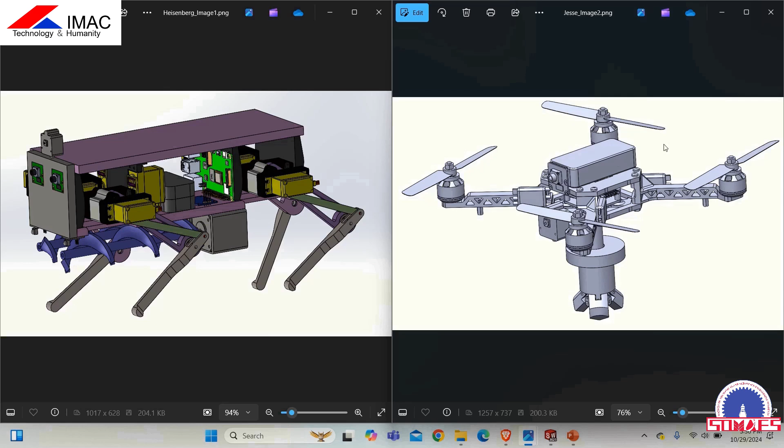This robot that you see here, this is an aerial robot. Jesse is a rescue drone which is equipped with advanced technological features, and it includes a gripper mechanism.

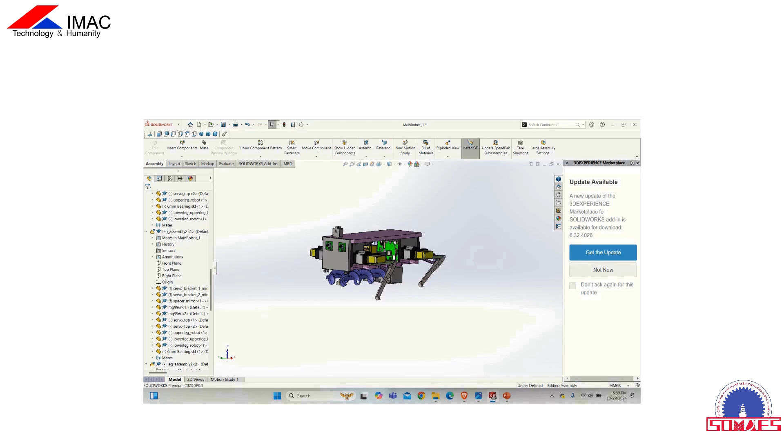So this is how Heisenberg looks in SolidWorks assembly. Heisenberg is basically a robotic dog type body that has been set up along with a helical movable body in the lower part. This is the helical movable body which will help the body float and commute on the water surface.

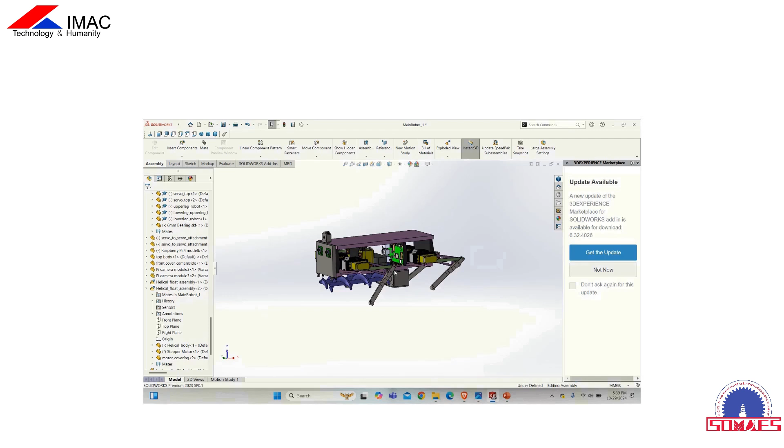This robot, we believe, is capable of navigating its own route, collecting information, and processing it to the main station to report the scenario and damages of the landslide and disaster-prone areas. This is equipped with a few cameras. This is the thermal sensing camera.

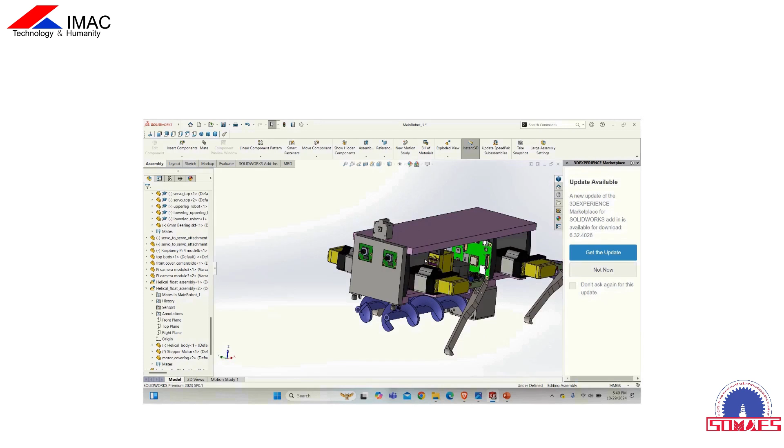This is just a prototype. It was very hard to design an actual thermal sensing camera. So using these technologies, an infrared sensor is also kept over here.

Using all of these in a combined way, it is, we believe, capable of navigating the route and processing information on the site of disaster. With the help of strong processors like Raspberry Pi and equipped cameras, we believe this is possible.

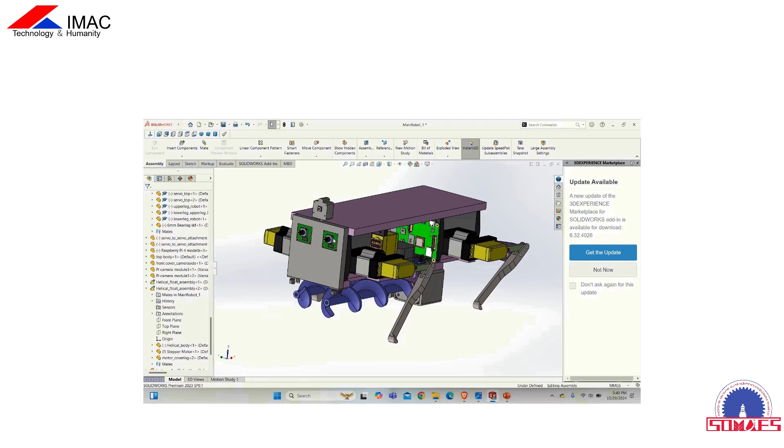It is also capable of doing computer vision tasks like object recognition and image recognition, which will be utilized to avoid obstacles and even while reporting certain instances of data.

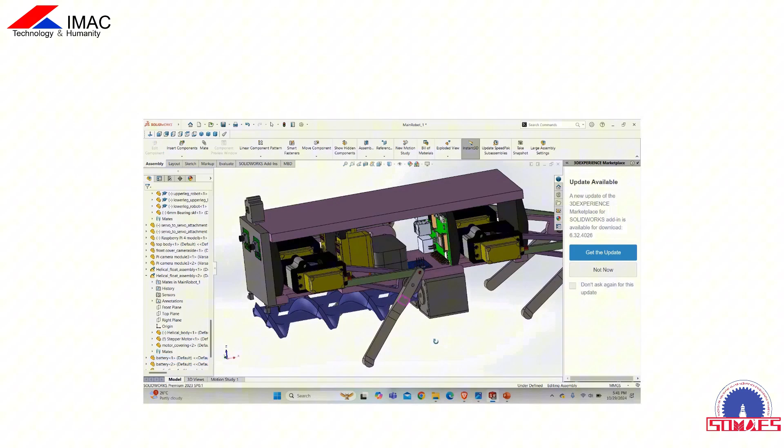It is equipped with two batteries, two lipo batteries, for this moment. One battery is responsible for controlling this terrestrial system, and one battery is responsible for controlling this aquatic propulsion system. I think this is going to help a lot when it comes to power save, because we are maximizing power optimization by using two batteries and also not compromising on performance.

This is the GPS sensor. It is also a prototype.

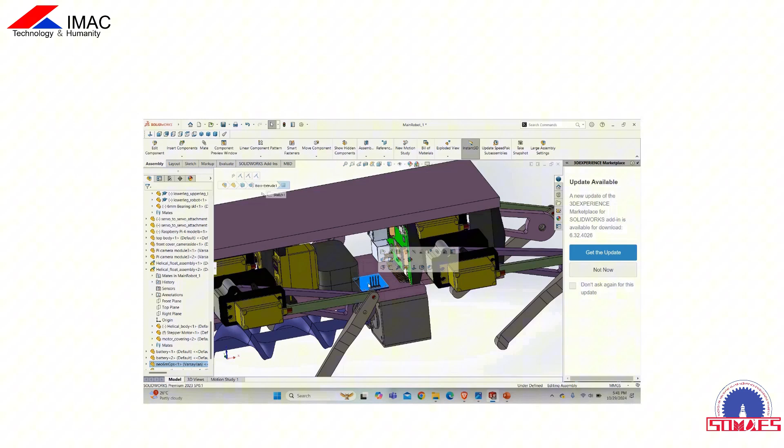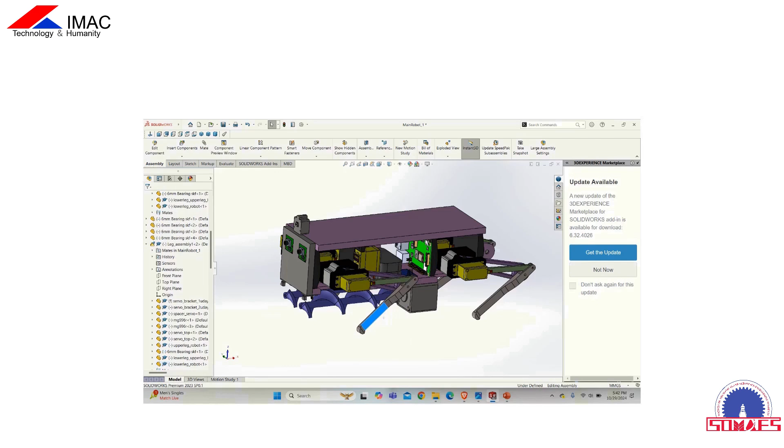So let's know more about the mechanism, the locomotion mechanism. So this is the locomotion mechanism. This way the robot will work. This is inspired from Boston Dynamics Spot, but it uses a 4-bar mechanism and it uses servos to perform that.

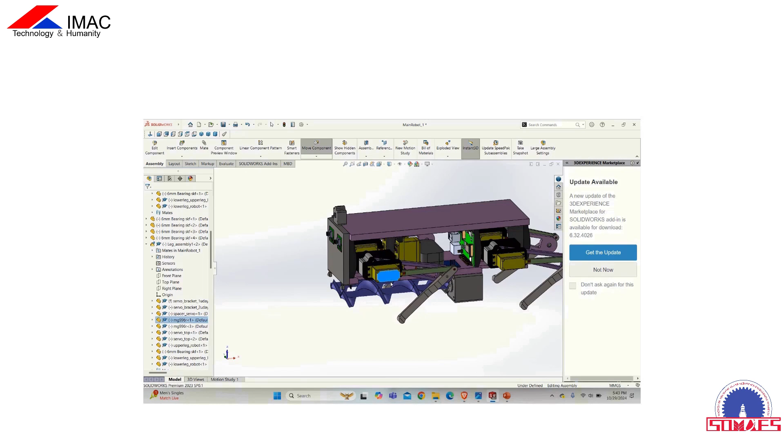So there are two linkages of servo, and these two front legs are capable of moving this way as well, so that it will be easy to balance themselves on difficult terrains and also work on difficult paths and maintain movement in different directions, not only straight but also angular direction.

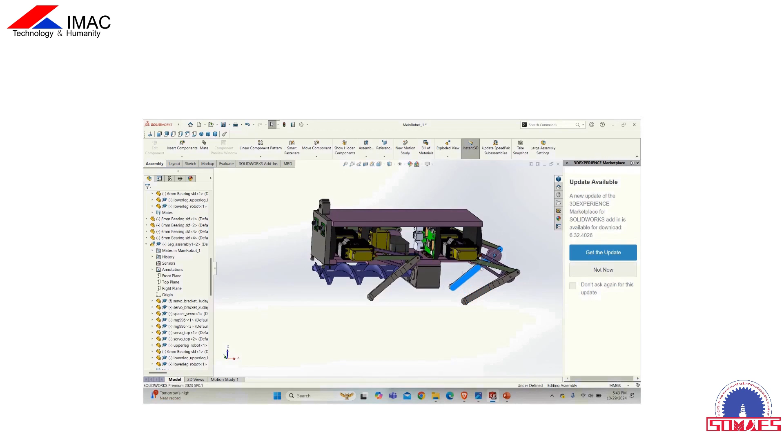So this is how they will work. This is applicable for all four legs. This will be controlled by the servo motor.

This is tilted with the help of this servo, and it will help the robot even go on different directional courses, like it can move at certain angles as well. So this is, we believe, really helpful.

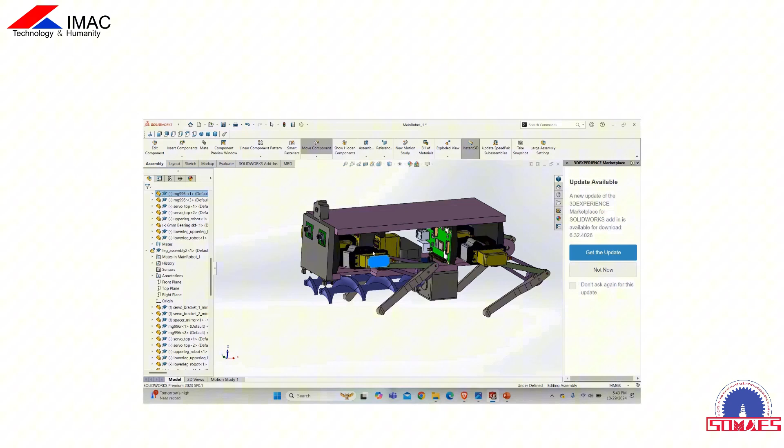Also about the helical screw propulsion system, this will most probably rotate clockwise, and this will rotate anti-clockwise, and this will help the robot move in a straight manner, and will tilt to attain a certain direction. So this is how the robot will perform inside water.

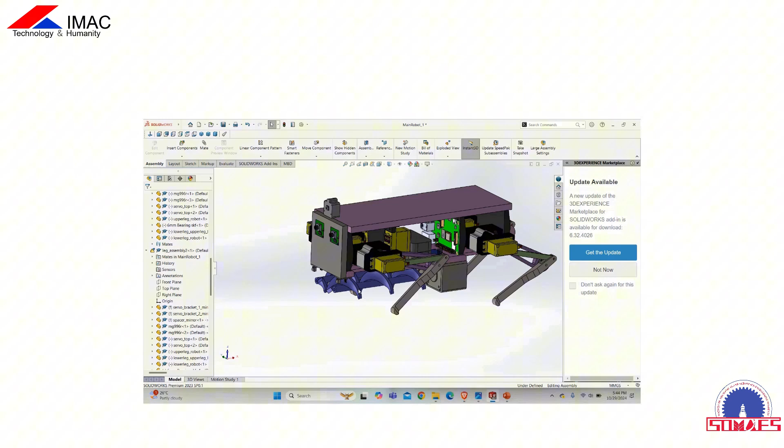So this way we can say that this robot is truly amphibious in nature. This robot is capable of transitioning seamlessly between land and water. On land, the servo-driven legs provide stability and movement, while in water, these helical screws activate to propel it through the water. This versatility will make it suitable for rescue operations, environmental monitoring, and exploration tasks, even in difficult terrains.

So this second robot, its name is Avenger. It is inspired by the rescue drone that is used by the fire department in Oak Island, North Carolina. The video link to that drone is provided in the introduction section of this robot, in the PDF that we have uploaded. This is an aerial robot that is highly mobile, convenient, and fast when it comes to rescuing victims.

This drone is equipped with modern technology. There are GPS sensors, strong microprocessors for the data collection and retrieval system, and there is a gripper mechanism as well, which is very useful and very handy for this robot.

It can be actuated and it closes like this. It can work based on some pneumatic or motor-driven system, which will be controlled by the control system of this drone. It will incorporate AI and machine learning to do a lot of work to identify the disaster site and thoroughly investigate the desired site.

So there is use of two cameras here. This is the thermal sensing camera, and this is the FPV camera. In this case we have employed a Raspberry Pi camera, but in case we are building this in a more expensive manner, we can import some expensive FPV cameras as well.

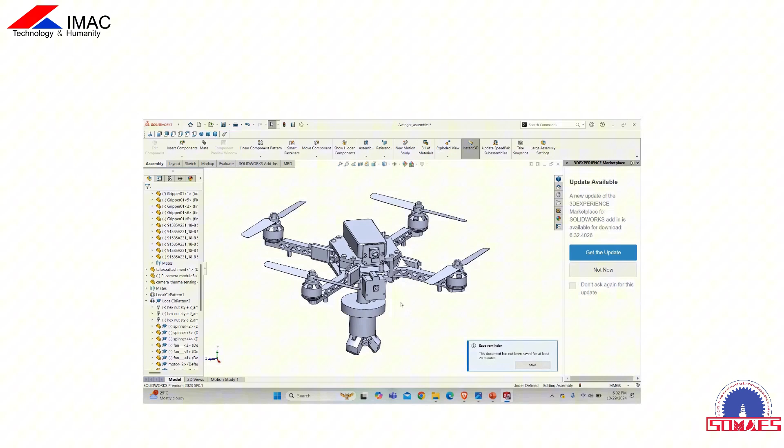Also this camera is very useful for a wide application of view, for a wide range of view. This gripper mechanism, I think, is the most useful case over here.

Because once the thermal sensing camera and the other camera identify someone in need, this can be used to deploy medical supplies, or help people who are nearly drowning by throwing tubes or swimming pads. So this is really helpful.